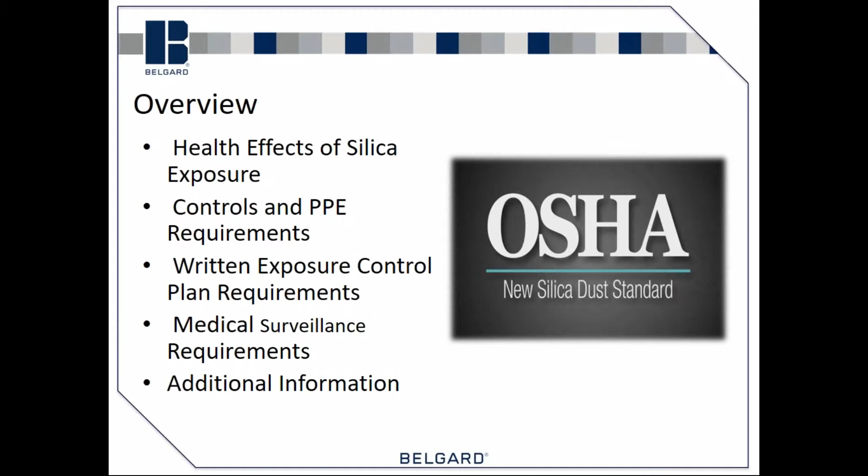So with that said, I'll get going into this, and like he said, we'll have a question and answer at the end. So we'll cover the health effects of silica, some of the controls and personal protective equipment requirements, and then talk about some of the new rules with it, which include a written exposure control plan, medical surveillance requirements, and some of the other things that you're going to need to know. But essentially, we start out with what is silica.

Crystalline silica is a common mineral that occurs in many naturally occurring and man-made materials, and many of them are used on construction sites. Some very common ones, obviously, are our block and brick products. It's in natural stone, and pretty much anything that you encounter that you cut or crush that creates a dust is probably going to have some silica in it.

Respirable crystalline silica are very small particles, typically 100 times smaller than an ordinary grain of sand. So in reality, an individual particle you probably would not be able to see with the naked eye, but if you are creating dust, then you are actually probably already overexposed according to the new silica laws. What happens is very small pieces.

Can you guys hear me all right? There's just a bunch of people saying they can't.

Is anybody there? Can they hear? Yes. Okay. Just want to make sure.

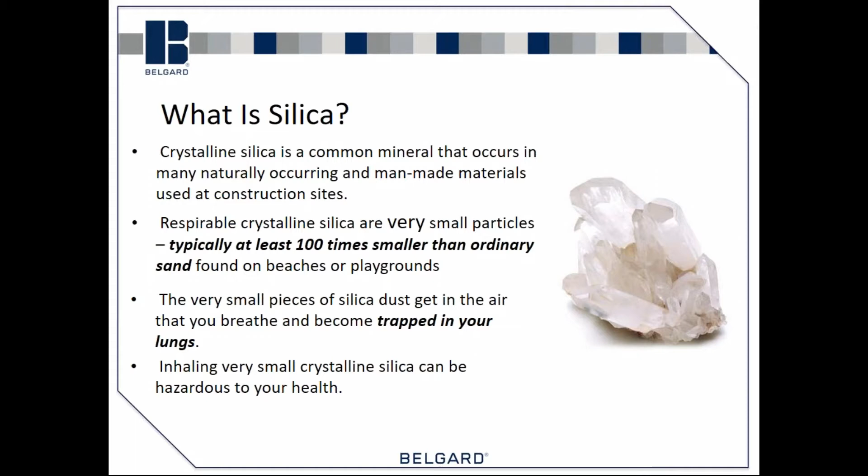All right. So with the silica, the dust that gets in the air gets breathed in and then trapped in your lungs. So the crystalline silica has been deemed hazardous to your health, and we'll go through a couple of different ways that it is.

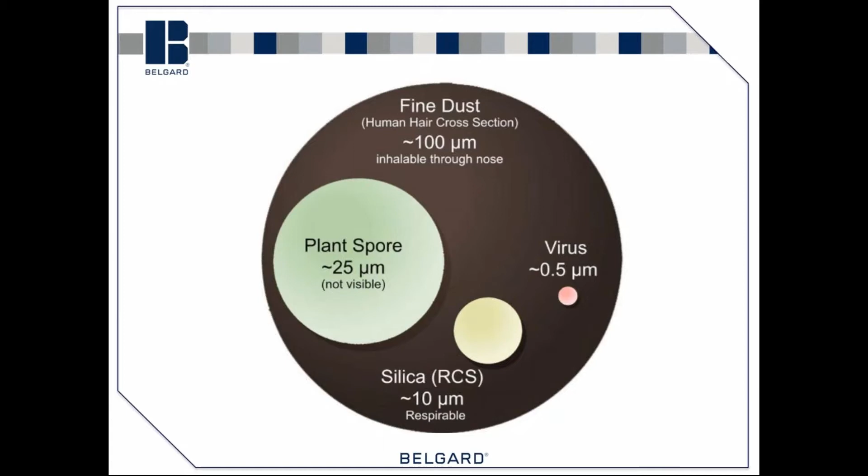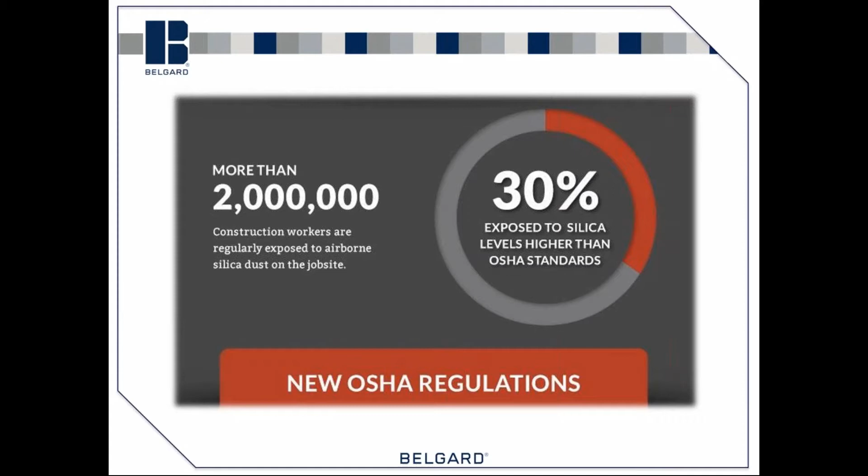So the new OSHA regulations, based on statistics, we know that more than 2 million construction workers are regularly exposed to silica dust at a job site, and roughly 30% of them are at levels higher than the OSHA standards. So it's not going to be very difficult to go above those standards just by hammering, chiseling, cutting, whatever it happens to be. When dust is flown into the air, you're going to be at that limit.

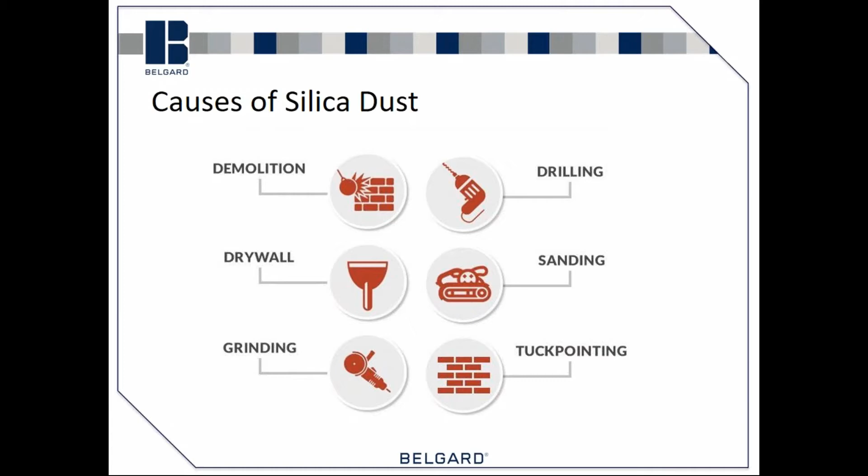launched into the air. And a lot of our techniques are demolition, any drilling that we do, any sanding, tuck pointing, grinding, all of that is stuff in the hardscape industry that we are dealing with on a regular basis.

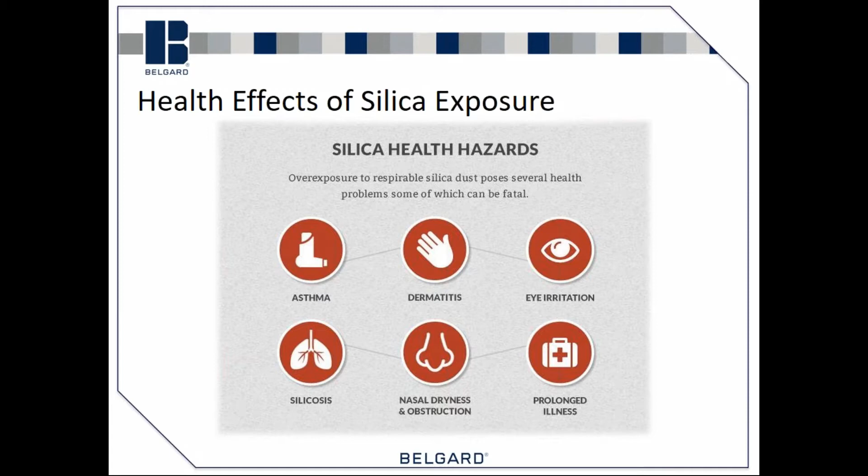So here's some of the health effects that silica exposure will possibly create. It's been linked to asthma, dermatitis, eye irritation, silicosis, nasal dryness and obstruction, and in some cases prolonged illness. My understanding is none of it is a direct cause, but it has been linked to a number of these.

And silicosis is probably the worst of those, and it is an irreversible, often disabling, and sometimes fatal lung disease. So essentially what happens, similar to cigarette smoking, is silica is ingested into the lungs, it traps itself in there, it blocks airway passages and reduces the capacity of the lungs to filter the air.

So there's three types of silicosis: chronic silicosis, which is the most common, which happens over a 10 to 30 year exposure. We have accelerated silicosis, which is more fast acting, and it may occur over 5 to 10 years. And acute may occur within a few months to less than 2 years, depending on what your susceptibility is to it.

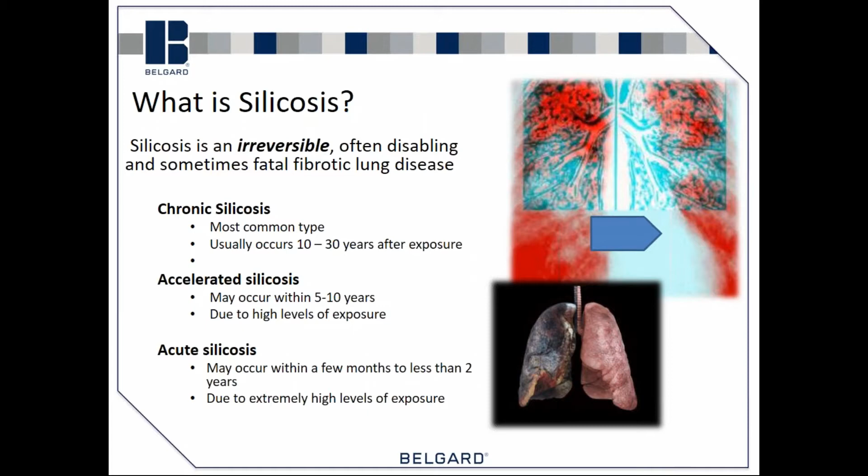So it is definitely something that is a concern and should be a concern for everybody in our industry, because we want to try to maintain healthy crews and healthy people in our work.

So some of the symptoms that you will see are shortness of breath, cough, fatigue, night sweat, fever, and sometimes you get a lot of that. There may be no symptoms in the earlier stages of this disease, so it could come on quickly near the end.

And I've kind of pointed out, since this whole scenario with the silicosis and the silica dust has come about, I've actually gone through a lot of the testing, just because I'm worried that if I'm going up the stairs and I'm short of breath, is this a problem from silicosis, or is this just me being out of shape?

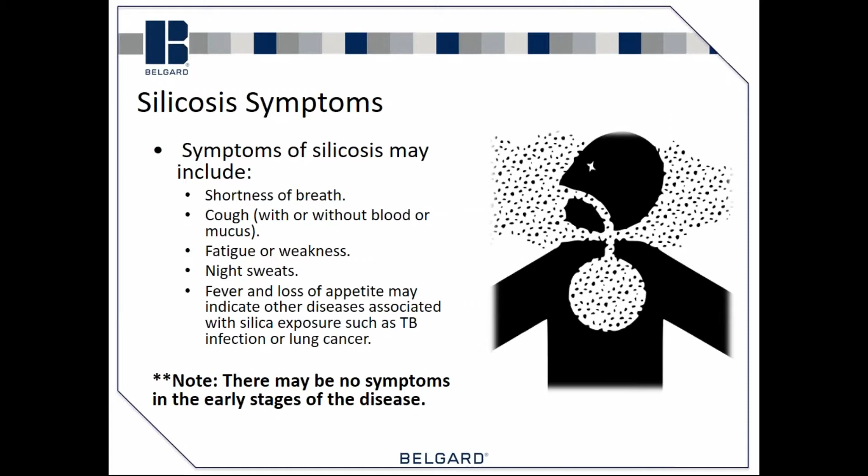And so all the medical testing that has happened, I've gone through it. Thankfully, I didn't have any signs of it, so it's definitely worth taking a look and getting checked out for it.

Some of the other health effects of silica: silica exposure has been linked to COPD, several types of kidney disease, autoimmune conditions, and also some types of TB or latent TB, and then of course the really bad one is lung cancer. So the exposure has been linked with all of those, and so the less exposure you get, obviously the better off you're going to be.

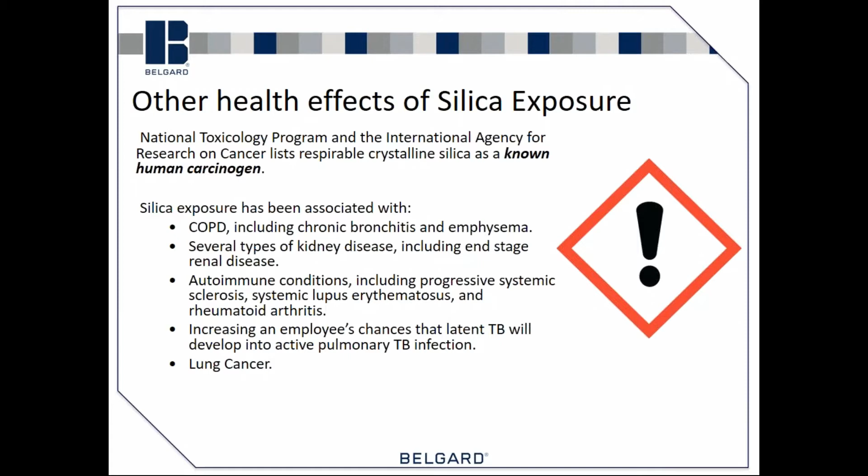So what is the new standard? Well, OSHA's new standard went into effect in September of 2017, so it is in effect right now, and OSHA could come out to your job site tomorrow if you're working and do an inspection. You will have to be in compliance with this as of right now.

Employees must use engineering controls, work practices, and personal protective equipment when exposed to respirable silica dust. Employees receive medical examinations under certain circumstances, and we'll talk about those in a little bit. And employees receive training on respirable silica dust and understand the controls and personal protective equipment in place and how to protect them from exposure.

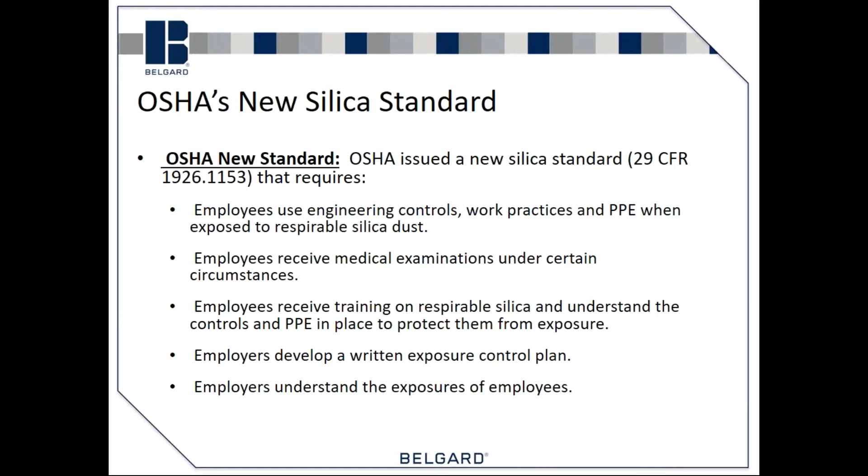Employers must write a written exposure control plan on how to handle scenarios where silica dust is being created, and employers also must understand the exposures of the employees themselves. So that's kind of the overview of the silica rules. And here is how it changed.

In OSHA, the permissible exposure limit, or PEL, was 250 micrograms per cubic meter of air. After 2016, the permissible exposure limit is now 50 micrograms per cubic meter. So they cut it to a fifth. It was low before, it's incredibly lower now.

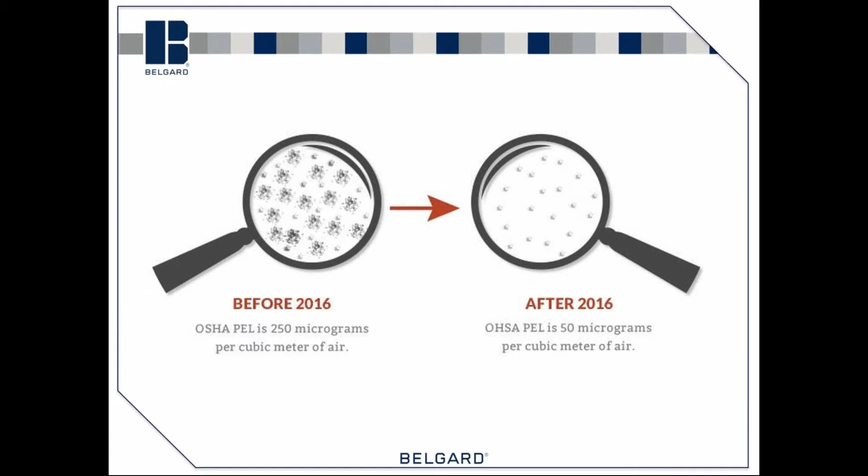So essentially, like I had mentioned before, if you see dust in the air, that is going to be over the permissible exposure limit. Now, that permissible exposure limit is a time-weighted average over an 8-hour workday. So a 5-minute exposure isn't going to throw you over if that's all you do in a workday. But understand that if you see it, it's going to be above the exposure limit.

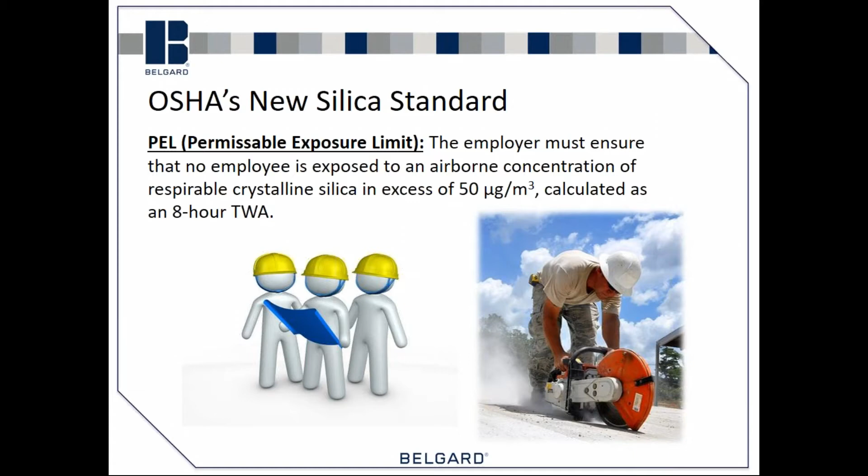The PEL, or permissible exposure limit: the employer must ensure that no employee is exposed to an airborne concentration of respirable crystalline silica in excess of 50 micrograms per cubic meter, calculated as an 8-hour time-weighted average. So there are going to have to be controls in place to minimize the amount of dust in the air, or a much more stringent policy on respirators, allowing the worker to work in the environment and not be breathing the crystalline silica itself.

So here's some of the things you should be able to do that can protect yourself. Understand the tasks that happen on a job site and which ones can generate silica dust, and minimize the exposure of that. Understand the new silica dust regulations and requirements. Use engineering controls, and we'll talk about those here in a little bit. And follow the proper work practices and manufacturer's instructions.

Use proper respirators. Review the written exposure control plan that your company has in place. Avoid working in dusty areas when possible. Attend medical screenings if required, and follow your doctor's instructions. So some common sense things in that, but definitely worth a review.

And another thing that maybe sometimes gets lost in the shuffle is good personal hygiene: not eating or drinking or using tobacco products in those dusty areas, washing hands and face before eating and drinking or smoking outside dusty areas. Do not use compressed air on clothes or surfaces.

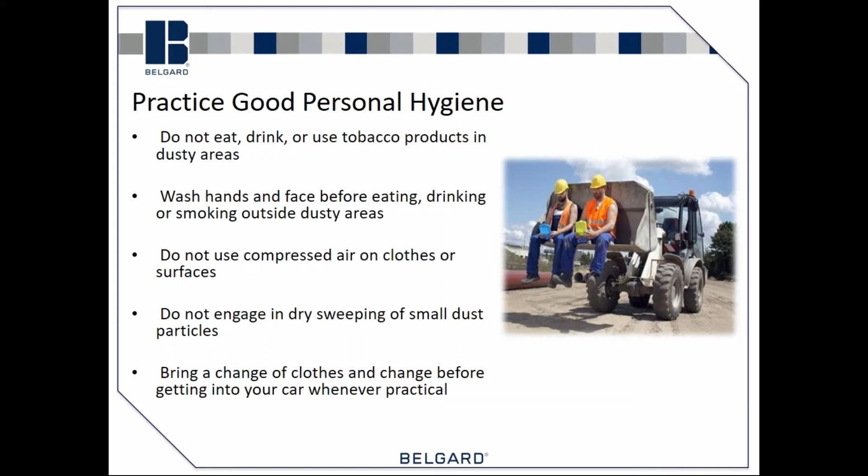So there's a few things I'm going to talk about that I really want you guys to remember. So if you've got a pen and paper and want to write this stuff down, some of the research that you'll want to do after this hour is all about Table 1. And I have on here that Table 1 is OSHA's gift to you, and that's somewhat tongue-in-cheek, but in reality it is kind of a gift for the small contractor, because there are several ways to come into compliance, and most of them require a lot of monitoring, possibly air monitoring and testing equipment, and then if it fails, you got to figure it all out yourself again.

But basically what Table 1 is, it's a list of common practices that cause dust on a job site, and what rules to follow in order to be in compliance. So for small contractors that have a few employees, and we talk about a written exposure control plan, you can use Table 1 as a solution to the tasks in your written exposure control plan. If you Google OSHA Table 1, you'll be able to find this form. And if you are following Table 1, you are basically in compliance.

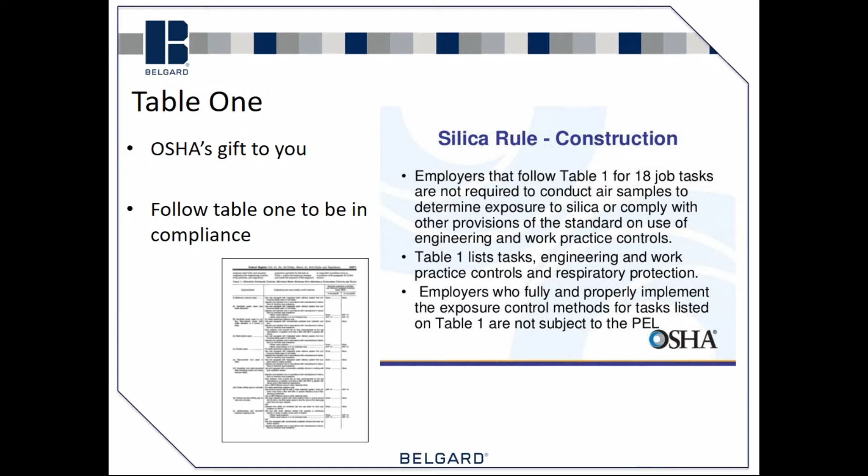So some of the engineering controls, and if you're familiar with OSHA's small business safety plan, engineering controls are basically ways to eliminate or minimize a particular hazard. So we're doing a couple of different things to control silica dust. The two very most common are going to be wet cutting or having some sort of vacuum dust collection system. Those are your two primary engineering controls. There really isn't any other out there that I'm aware of.

If you do some more Google searches on OSHA, you'll find a lot of really good videos, because both the vacuum manufacturers and the saw manufacturers are on top of this new law and new regulation. So they've actually got some really good videos on YouTube relating to their products and how those products will help you be in compliance. So be aware of that. Again, do some more research. When I do this class, I normally say the biggest thing to remember is don't send up a big cloud of dust. One of those ways is going to be the wet cut. One of them is going to be the vacuum cut.

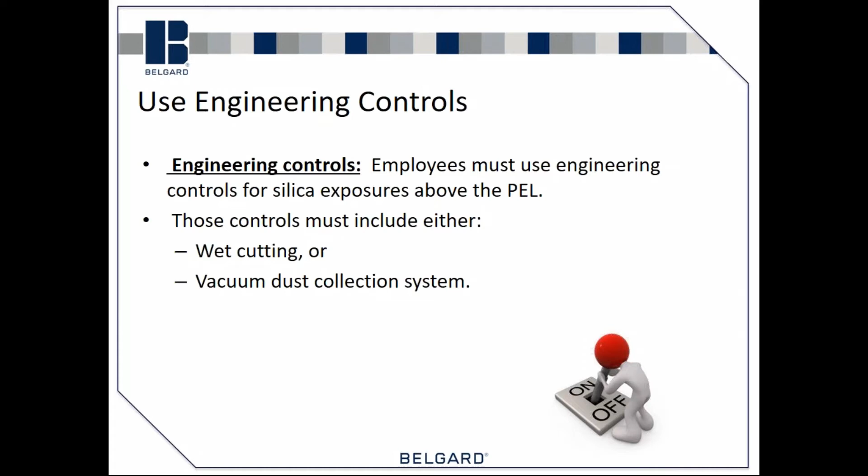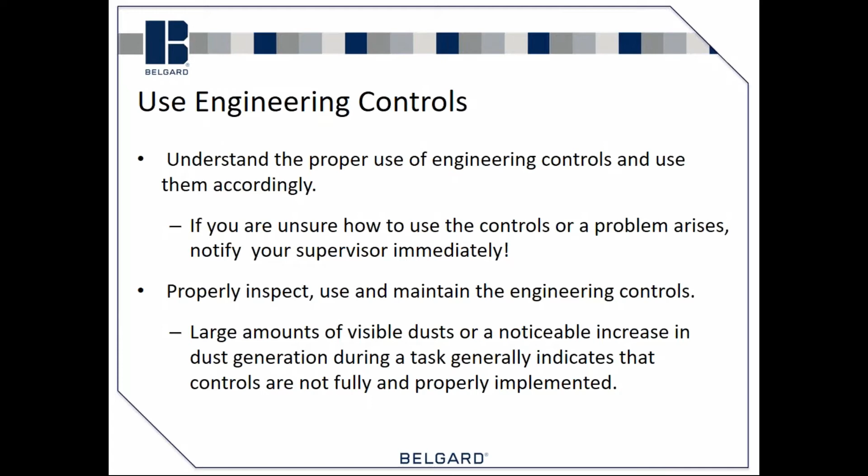And if you're not setting up a big dust cloud in somebody's backyard, you run a much lower risk of having somebody stop out to your job site. It's going to be beneficial to your employees from a safety standpoint and beneficial to your company financially as well, because there are typically fines involved when OSHA shows up at your job site. So understand the proper use of the engineering controls and follow them. If you're unsure how to use the controls or a problem arises, notify a supervisor immediately. Properly inspect the equipment, make sure that it's in working order on a regular basis. Large amounts of visible dust or a noticeable increase in dust generation during the task normally indicates that controls are not fully or properly implemented.

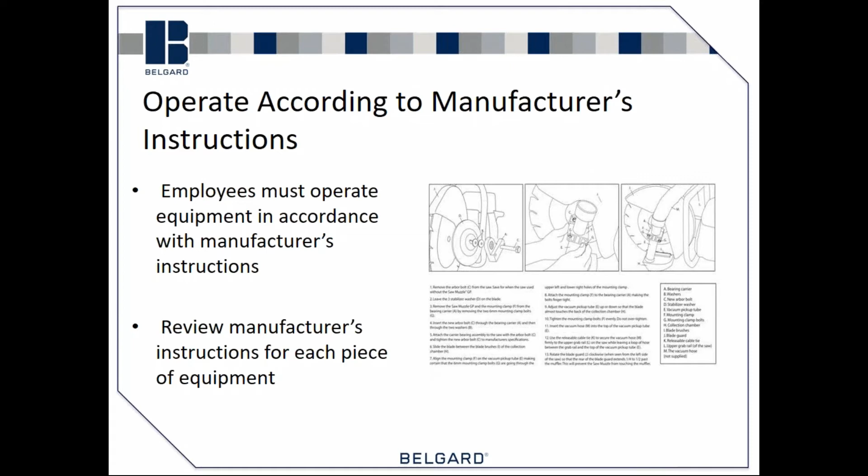And one of the things with engineering controls is, if you're cutting wet, it has to be a manufacturer's installed wet cutting system for that piece of equipment. So in other words, you can't start cutting through a brick and have a second employee hold a garden hose onto the brick or block and cut through it. That doesn't qualify as an engineering control. It has to be something that is attached and made for whatever model equipment you're using. You can't just create your own ad hoc control. And then follow work practices. For silica exposure, when performing tasks, think of different ways that you could do that task that would reduce the likelihood of exposure levels.

Work practice controls will vary based on the task and the equipment used. The other thing I bring up a lot of times is think about the products that you're using. There are products on the market that might minimize the amount of cutting that will happen on a job site, or you might be changing a pattern in your pavers so that you can lay a pattern that you don't have to cut.

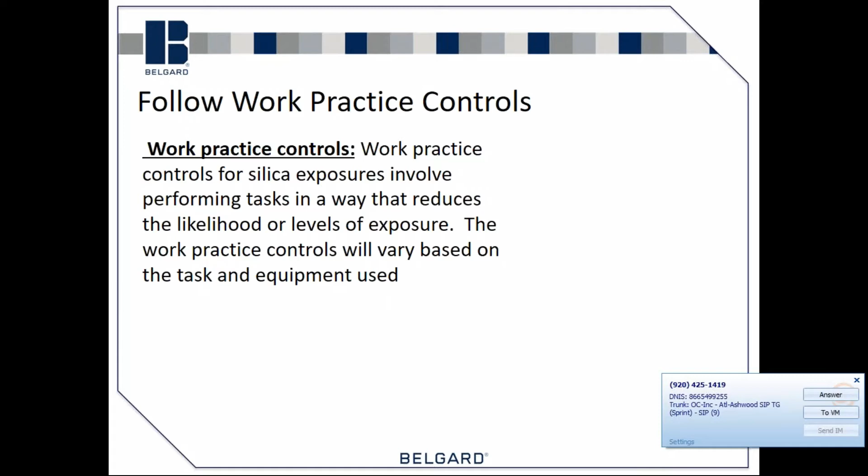So just different ways where, if you can just reduce or eliminate the need for cutting on a particular project, then you can really reduce the amount of crystalline silica that'll be exposed. So different things to think about with the wet methods is full and proper implementation of water controls. Again, it has to be something that is on site or attached and is supposed to be on that piece of equipment. Flow rates specified by the manufacturer are used.

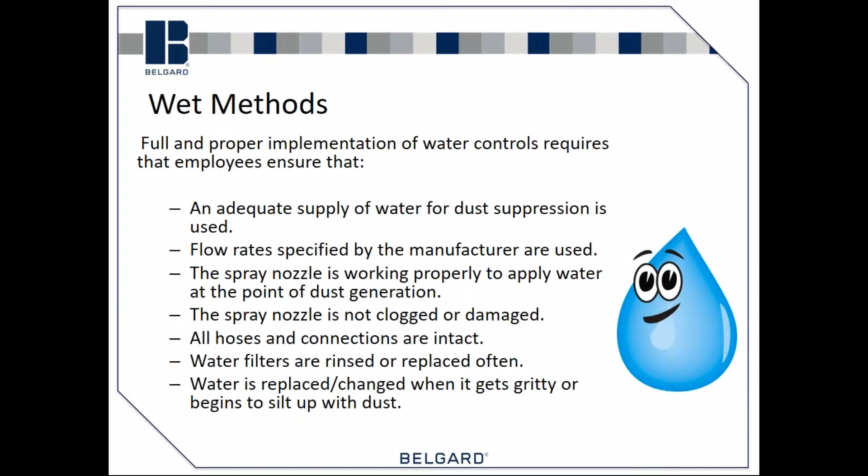An adequate supply of clean water is always really important. So it has to be a constant supply, or at least something, because it's harder to recycle it and keep it clean. The spray nozzles are working properly. They're not clogged. All hoses and connections are intact. Any filters are rinsed and replaced often, and water is replaced or changed when it gets gritty or begins to silt up with dust. So there's a number of different pieces of equipment that are available to contractors for wet cutting.

We're not going to really get into those, but you could get handheld, you can get table saws, you can get walk behind. The big thing to remember, and this is why I caution everybody that this new rule is kind of a moving target, is that you can cut wet, but all of the wastewater accumulates on the ground. Number one, it could get your work surfaces dirty and you need to rinse them. But when you cut wet, the waste falls to the ground and it dries. It turns back into silica dust. And when you start to sweep it, now you're being exposed to it again.

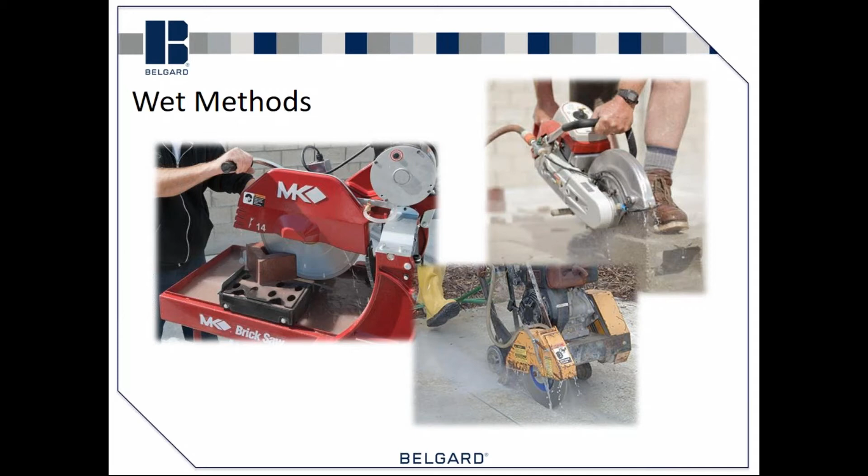So just because you're cutting wet doesn't necessarily mean that you are in compliance, because once that material dries, it goes back to dust form and there's going to be issues. So just be aware of that and try to eliminate as much of it as possible. The dry method is, again, vacuum systems. There are vacuum systems for grinders and saws and anything else that might possibly create dust. Make sure the shroud is intact and encloses most of the grinding blade or saw blade. Hoses and connections are intact without kinks or tight bends. And the vacuums have enough suction power to capture the dust at the cutting point.

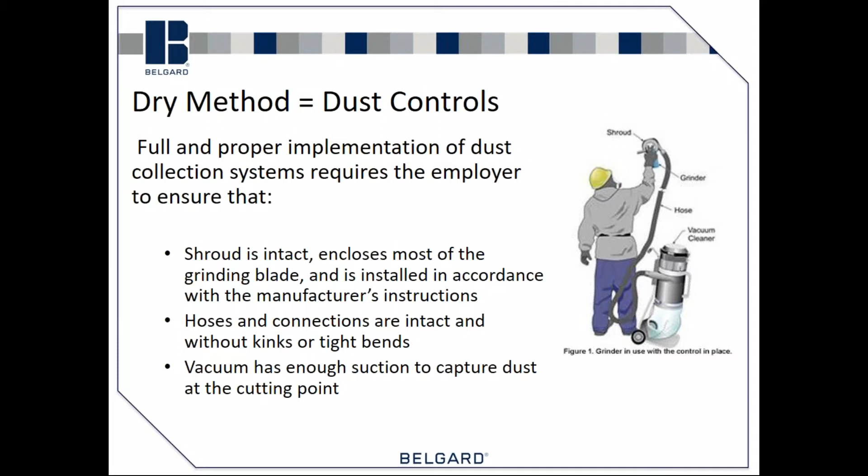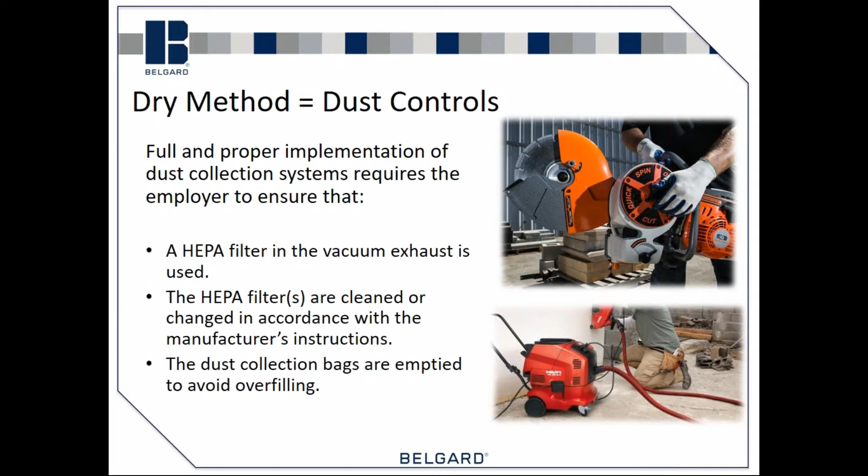Some of it actually also says to use dust collection bags and make sure that they're emptied to avoid overfilling. So you're not just taking a vacuum and dumping it into the dumpster, which is going to create a big cloud of dust. It actually will have some sort of collection system, and you can just dump the bag in the garbage. So housekeeping also can create dust. If you think about your warehouse or your shop and the act of sweeping itself, a lot of the stuff that's settled onto the floor of your warehouse or shop can be silica dust, and you need to be aware of it.

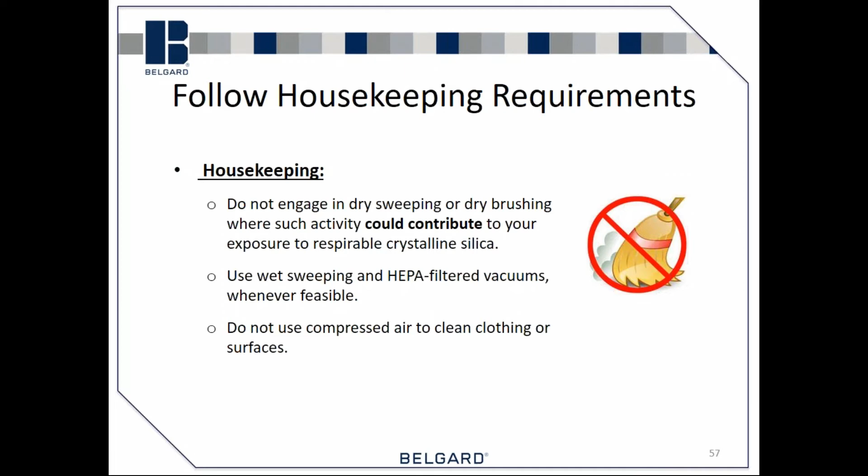So some of the recommendations for that are to use wet sweeping, so either mist the floor a little bit to cut down the dust and then sweep it, or vacuum it. And then also they have sweeping compounds where you can sprinkle a sweeping compound onto the floor, which is designed to minimize or eliminate dust as you're sweeping. Big key here is do not use compressed air to clean surfaces or clothing, because again, that will just generate a significant amount of dust.

That's the engineering control. So again, wet cutting and vacuum cutting, and then we get into personal protective equipment, or respirators. Wearing your respirators while installing or implementing controls or work practices. So even if you're using a vacuum system or a wet cut, it's not a bad idea to have a mask on. And if you follow Table 1 that I talked about earlier, sometimes it'll say you need to have a respirator, sometimes you don't.

What we know as a dust mask is actually a respirator. When engineering controls and work practices are not feasible, you should be wearing them. When engineering controls and work practices cannot reduce the amount enough, you should definitely have them on. And then whenever your supervisor requires it. If it is a company policy to wear it, then you should be wearing it. Ensure that your respirator is properly fitted and perform a seal test every single time you put on your respirator.

Cutting concrete. Well, like me, many of you may have facial hair. That actually affects the fit of respirators, a dust mask type respirator and maybe some of the other ones. If OSHA comes out and you've got facial hair, that respirator may not be compliant because it's not fitting you properly, and dust can get in there. So be aware of the rules and how those respirators will fit you.

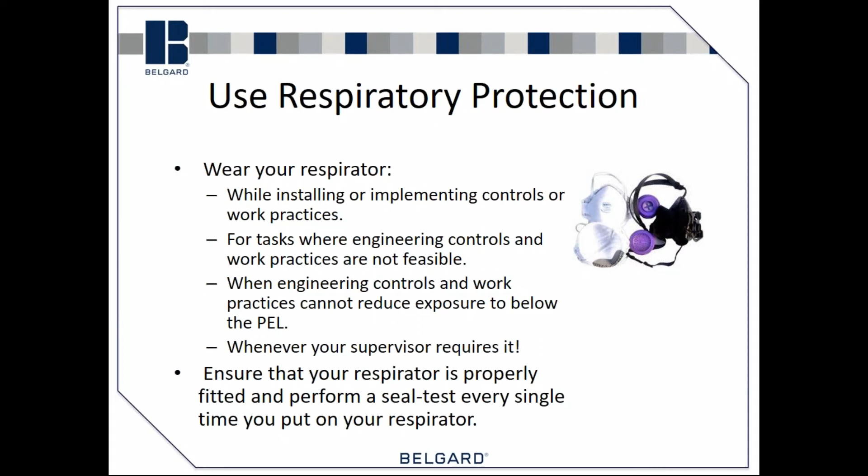The next guy raised his hand and said, I had the same exact problem. My employee was not wearing his mask. OSHA showed up, wrote me a ticket for $1,300. And that was just the one guy. If other guys are in the vicinity and they're not wearing a mask, you will get a ticket for everybody that's not in compliance. So this is a rule that will affect everyone, and it's your bottom line and your company. And if an employee is not wearing a mask and you need them to be wearing a mask, you may have to implement some consequences that are not very pleasant. So just be aware of that, these rules could come to bite you, possibly in the future.

So one of the other requirements for this new silica regulation is a written exposure control plan. Every employer is required to have a written exposure control plan. A written exposure control plan is a description of the tasks that involve exposure to respirable silica, a description of engineering controls, work practices, and respiratory protection to limit employees' exposure to silica, a description of the housekeeping measures used to limit employee exposure, and a description of the procedures used to restrict access to work areas, which will minimize the number of employees exposed to respirable silica as well.

So essentially, with this written exposure control plan, you go through and look at what your daily tasks are, and if you are going to take a paver or a block and cut it, how are you going to control the dust or the silica from that particular activity? Now, you can do it a couple different ways. You can create your own plan and test it and test the air quality and that kind of stuff, which takes a lot of time and expense. If it works, great. If it doesn't work, you got to spend the time and the money to do it again.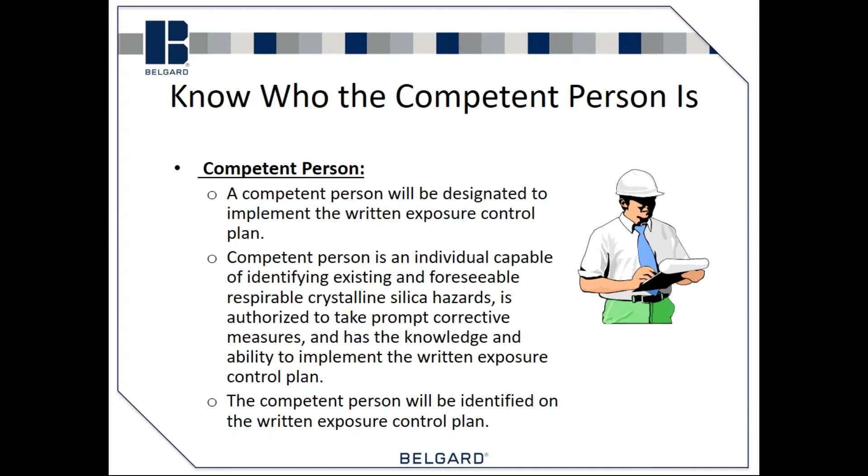Now, for this competent person, there is training available from OSHA that will train that competent person in your company. So be aware of that and maybe start to think about who that's going to be and take the steps needed to make sure that they are in compliance and can do what needs to be done to become that competent person.

Another thing that is a little bit of a gray area in this is restricted access. When you are in the process of creating silica dust on a job site, you need to restrict access only to essential personnel. And that includes an area around your workspace that will also keep clients out, possibly other subcontractors out. You have to rope it off or designate that area to make sure that it becomes restricted. And you can do that in a number of different ways.

You could schedule your tasks when others are not around. You could tell employees to stay out of areas where dust is generated. You could move employees to areas where there is no exposure to dust. And of course, post warning signs, cones, or barriers to keep people out of a specific area. This is important to understand, but at the same time, OSHA does not define what immediate area is. And so that's where, again, it's a little bit of a moving target.

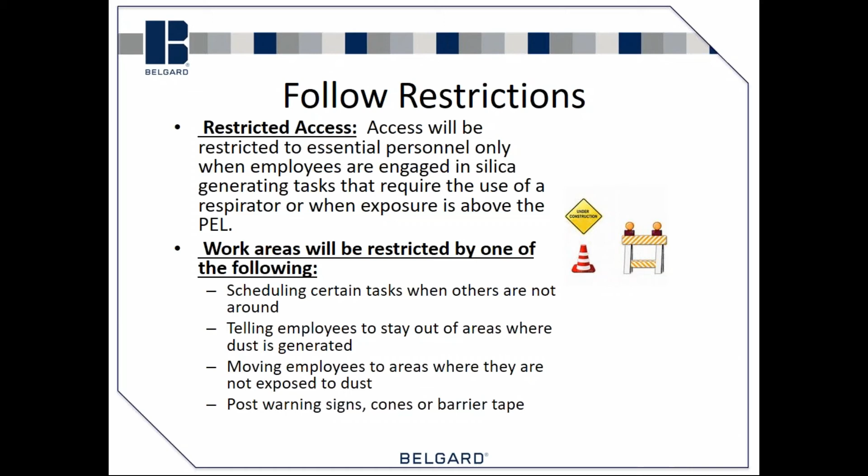Then medical surveillance is also part of this, and the employer is required to make medical surveillance available at no cost to each employee who will be required to use a respirator for 30 or more days per year. Now, this is important to understand. If they're doing an activity from Table 1 where a respirator is required, and they do that more than 30 days in a calendar year, then the employer must provide medical surveillance, which will include chest x-rays and lung assessments and all that kind of stuff.

But if they're doing a task where they're not required to wear a respirator, but they voluntarily put one on, it doesn't count as a day. Now, the other thing is, when you say 30 days in a year, if you fire up a saw and you cut 1 block, that is considered a day. So think about that.

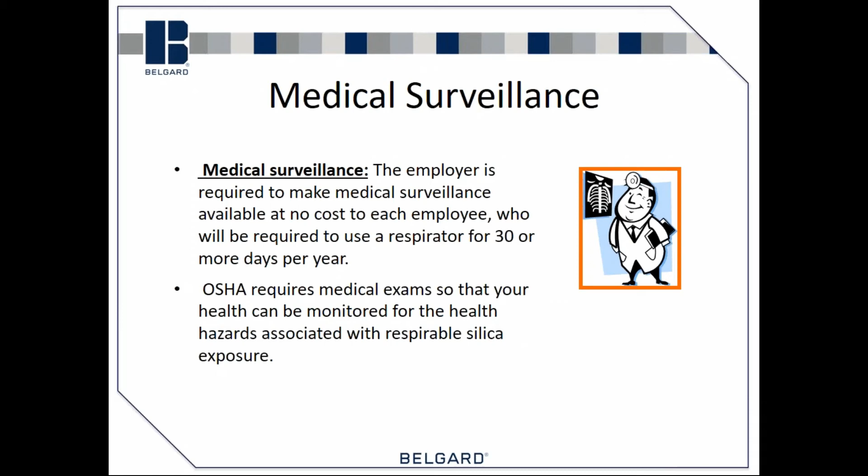So that's where you might want to designate, instead of everybody knowing how to use a saw and everybody doing the cutting on a job site, you may want to limit it to 1 or 2 people that are really good at doing the cutting, and then that is their focus and that is their job, and it'll be a lot easier to control less people to be able to control the silica dust that is available to them or that they get exposed to.

Essentially, all the medical examinations and procedures required by the silica standard are performed by a physician or licensed healthcare provider. The exam is going to include medical and work history, a TB test, a physical exam, a chest x-ray, and a pulmonary function test. So anything that's related to the lungs is going to be required in these medical examinations.

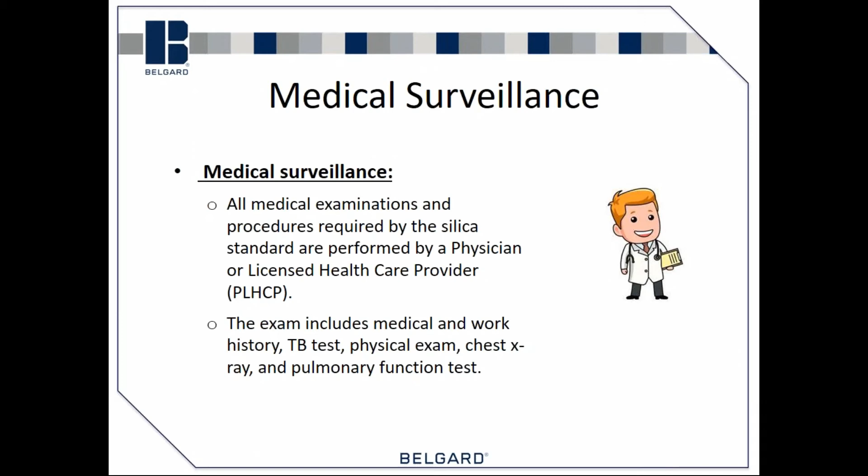And then the frequency of that is, if you are exposed to silica more than 30 days in a year, these exams will be offered within 30 days of the initial assignment. And then they will be repeated every 3 years as long as that employee is employed by you. So there needs to be some tracking with that.

And the dated copy of your last licensed healthcare provider's written medical opinion must be provided so we can determine when the next periodic medical examination must be performed. So again, it's basically every 3 years if you're cutting or exposed to silica 30 days in a calendar year.